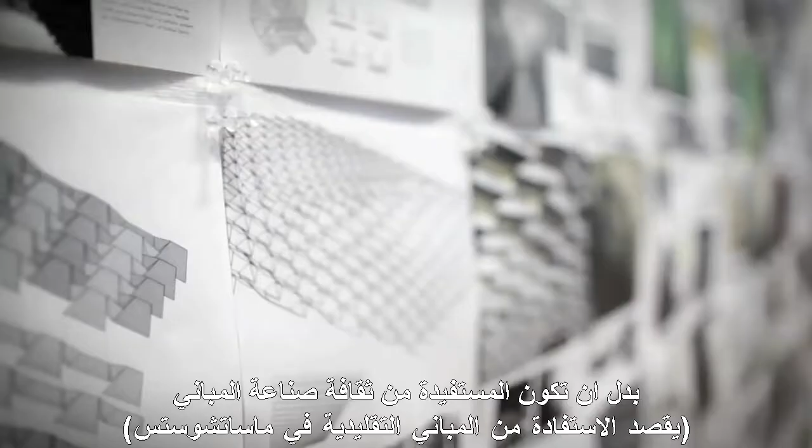Well, MIT is a very different kind of institute. Instead of becoming the recipients of building industry culture, we can now change building industry by the kinds of experiments we're doing in school.

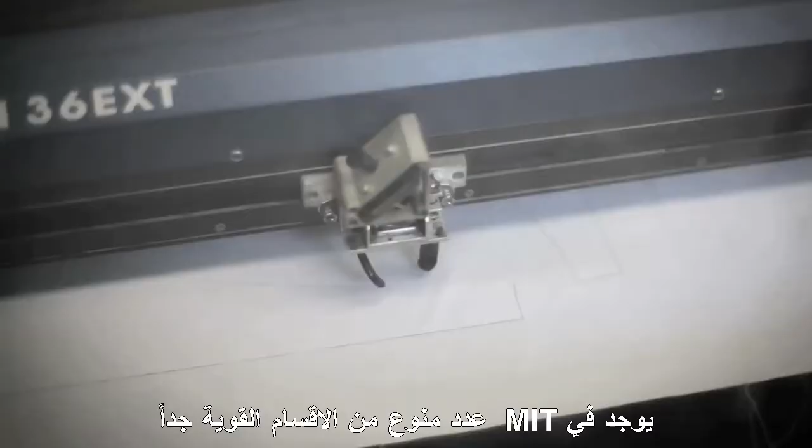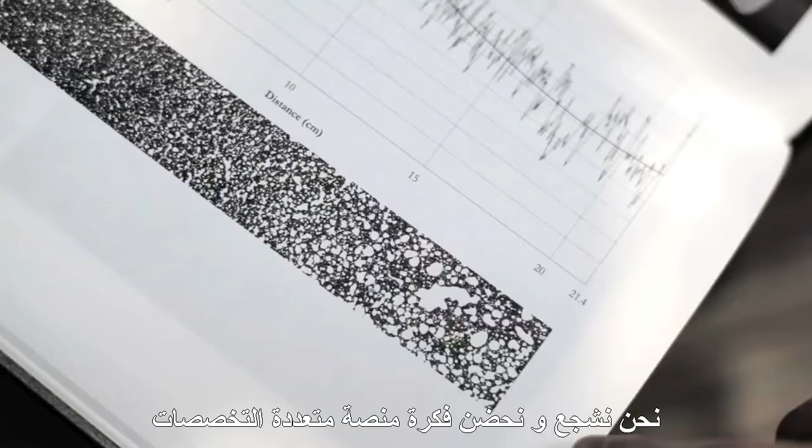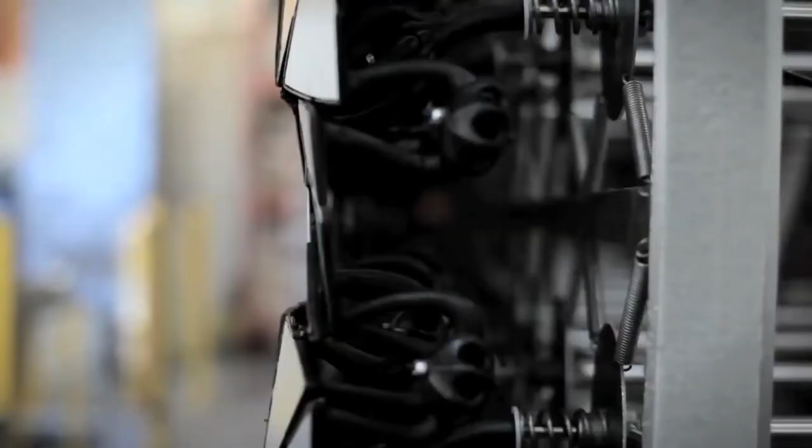MIT has a variety of departments that are so powerful that they have the potential of radicalizing what we do in design and in the architecture department. Even the way that we've structured our curriculum around workshops and other kinds of collaborations fosters and encourages this kind of cross-disciplinary platform. So we're situated perfectly for the kinds of things that only MIT can do.

The invention of human artifacts of any kind always consists of three elements: the geometry, the process, and the material that constitute that artifact.

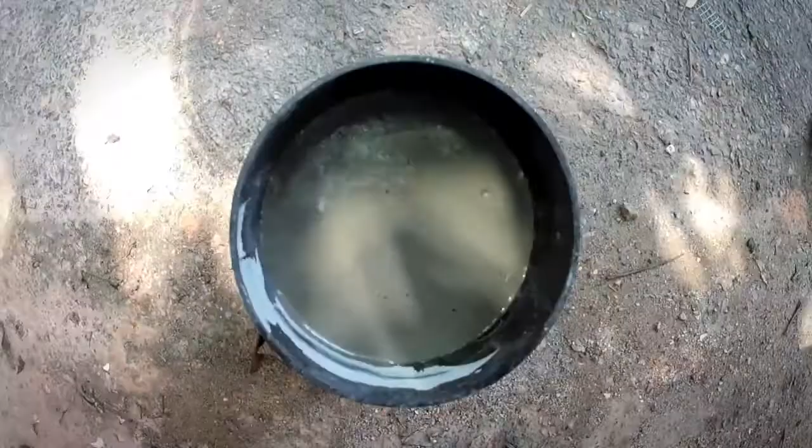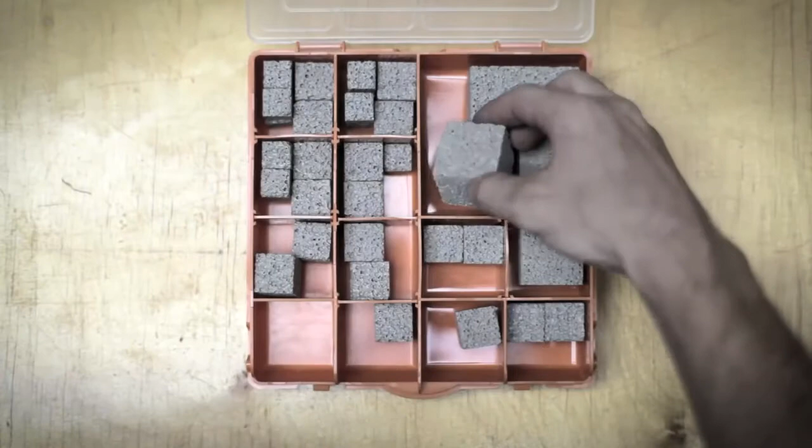It's very clear that new materials engender new forms, and architectural design benefits from addressing and applying new materials in an informed way. The Emergent Materials Group and the Urban Metabolism Group share a central interest in materials for the built environment. Lately, we've been working a great deal in the area of foamed materials, especially foamed cements and concretes.

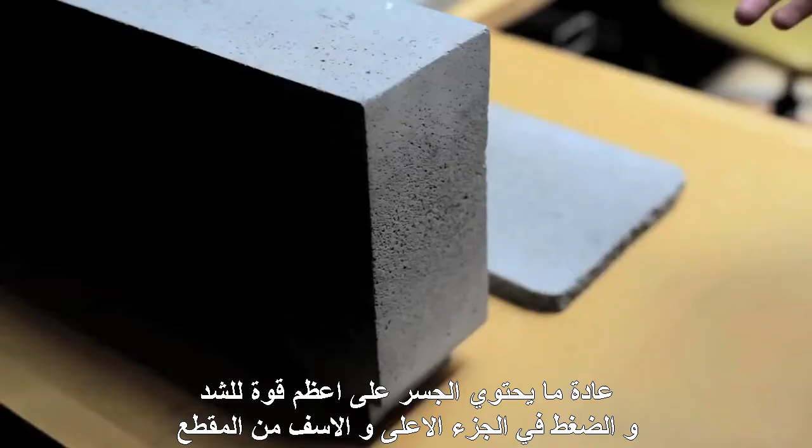So typically a beam in bending is going to have the greatest amount of stresses on the top and bottom, so we can reduce the amount of material on the interior of a beam.

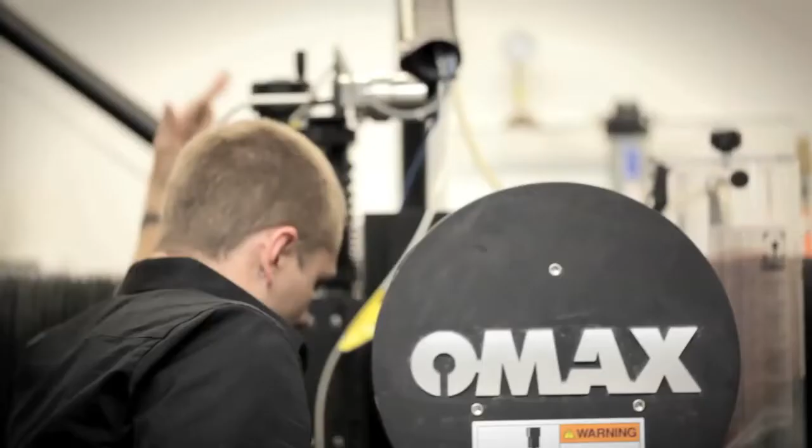The work really tries to address that there are two main paradigms throughout almost every industry. One paradigm is what can you design, what can you compute or analyze, and the other paradigm is what can you physically construct, or what can you build.

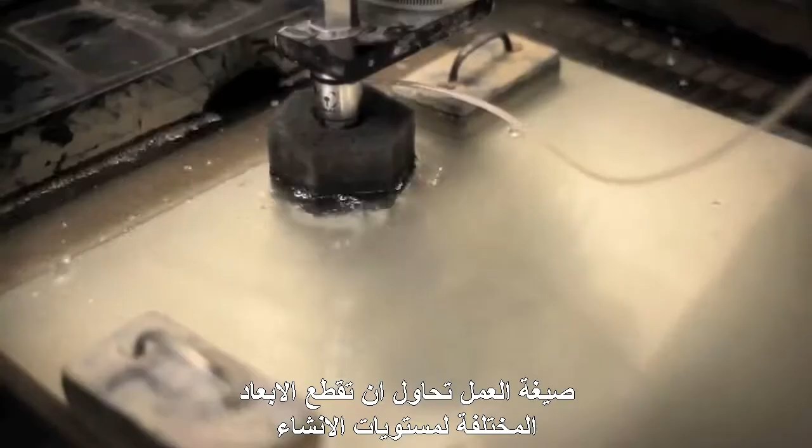The work really tries to traverse all scale lengths. It tries to work from the nanoscale, which is traditionally where we see self-assembly in biological and chemical examples, and it tries to bridge that and say, can't we use this phenomenon of self-assembly as a new paradigm for building things at large scale?

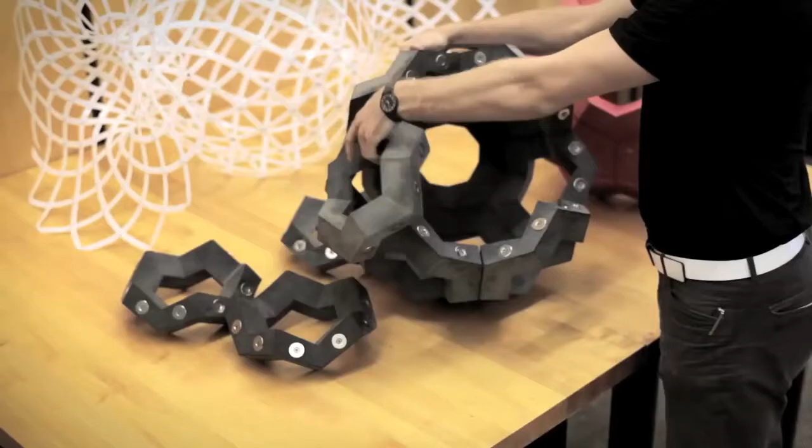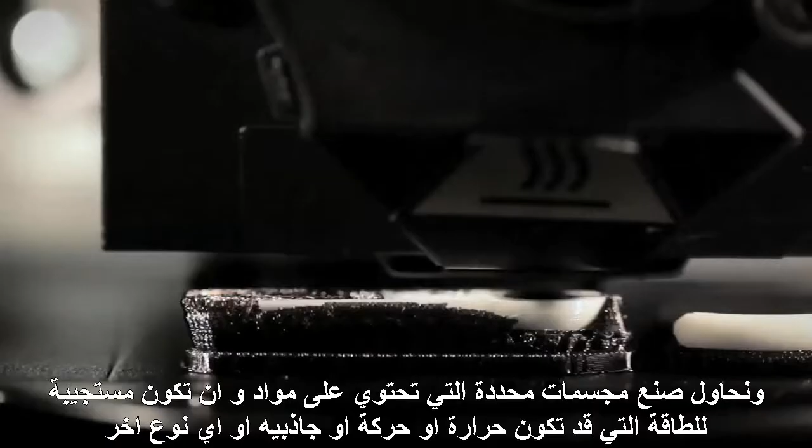We work with any type of material, synthetic or natural, and really try to design specific geometries with materials in mind. When you design those two together, they can respond to energy. The energy sources can be heat, shaking, gravity, pneumatics, electronics—any type of energy. When you mix that with the geometry and material properties, they can respond and change state.

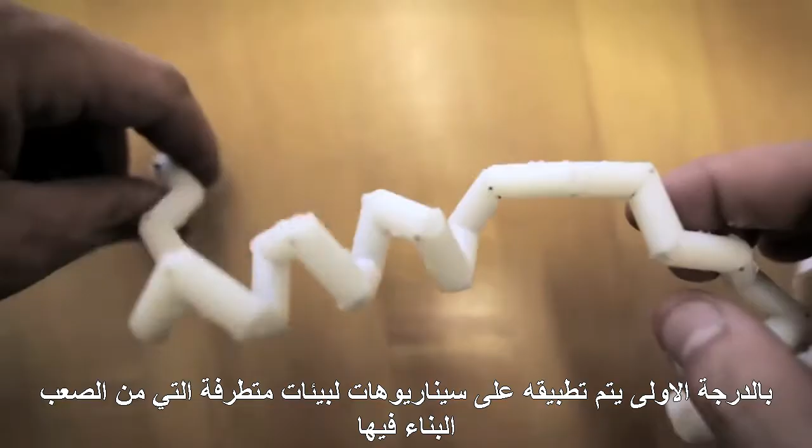Primarily, it will first be applied in extreme environments, scenarios where it's difficult to build.

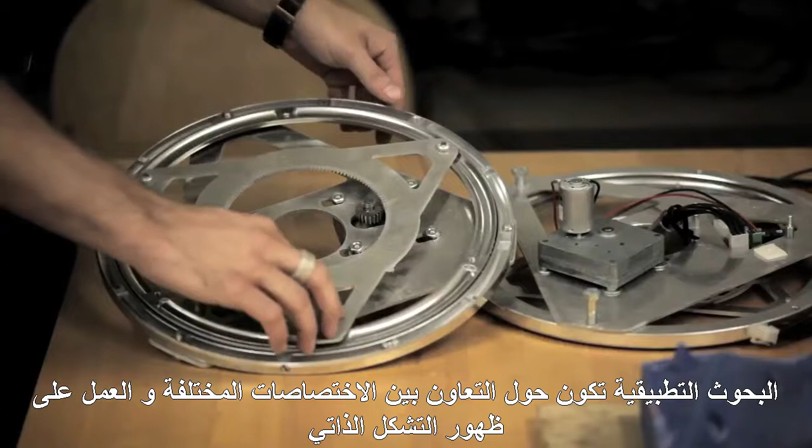The research and the practice is really about cross-disciplinary collaborations between designers, scientists, and engineers working on this phenomenon of self-assembly, discovering where we find it naturally, where we can use it synthetically, and trying to apply that at all different scale lengths.

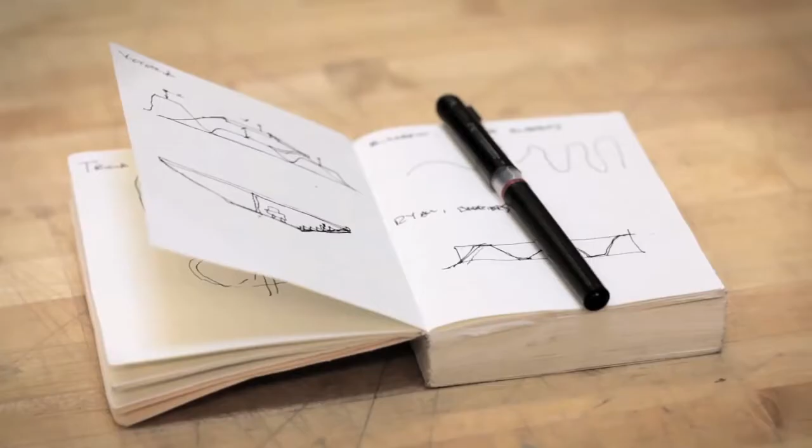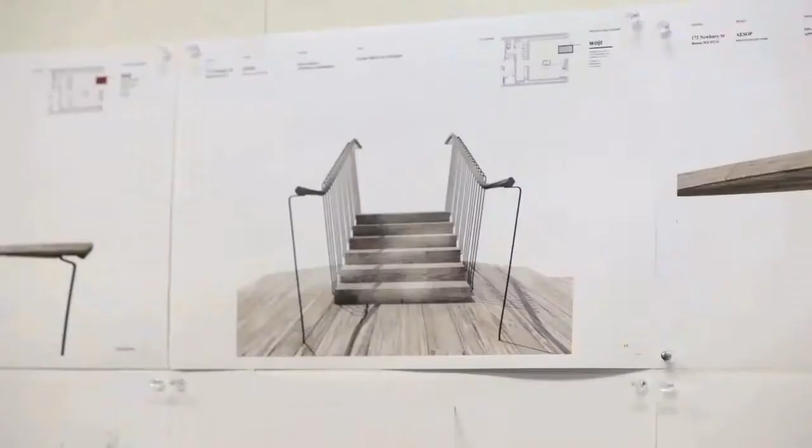The focus of our work, at least at this smaller scale, at the scale of art installations or retail, we leverage CNC fabrication methods, but not as a way to exude their prowess necessarily, but more as a way to help us get at a particular formal agenda.

An installation called Tótems, which in a way is a kind of proto-architecture—not quite architectural, not quite sculptural—I think it offers a kind of proposition to each of those disciplines.

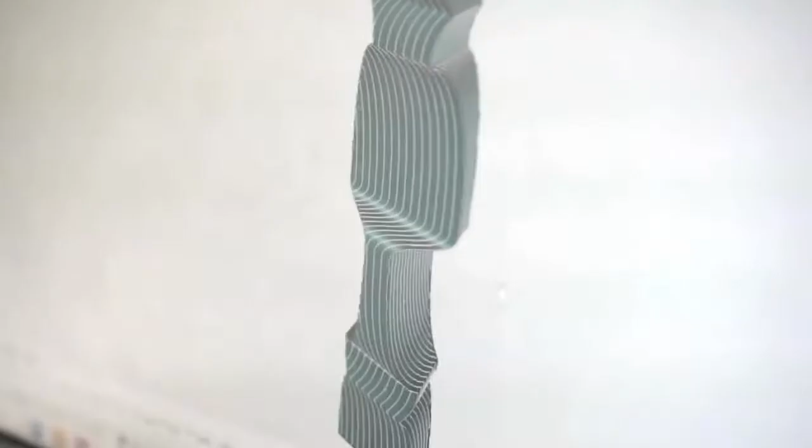We do a lot of testing via 3D prints. A lot of the formal investigations for Tótems specifically happened in 3D prints. We did maybe 30 to 50 3D prints of the totems as a way to understand how the light and shadows were working, and how best the anamorphic effects were working, before we went to the large format wire cutter.

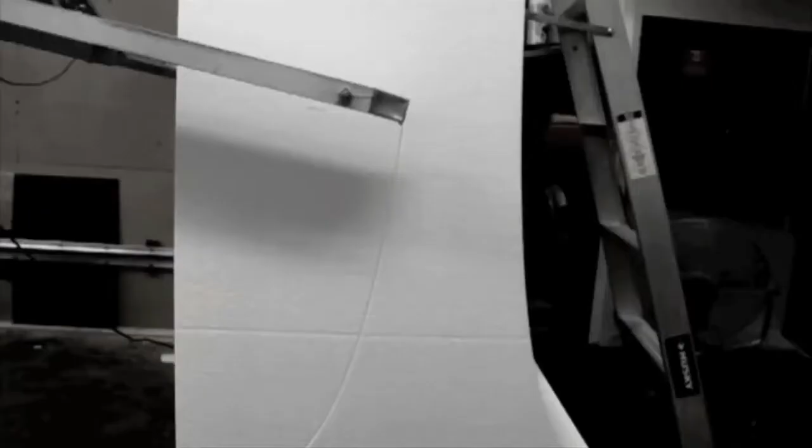In terms of collaborations, some of those happen here at MIT. Joel Lamere and I are developing an installation now, an anechoic chamber, which uses industrial felt both on its exterior and as a way to absorb sound on the interior. I'm bringing a kind of disciplinary, formal, or geometric interest on one hand, and also a certain set of specialized understandings of the behavior of these sheet materials on the other.

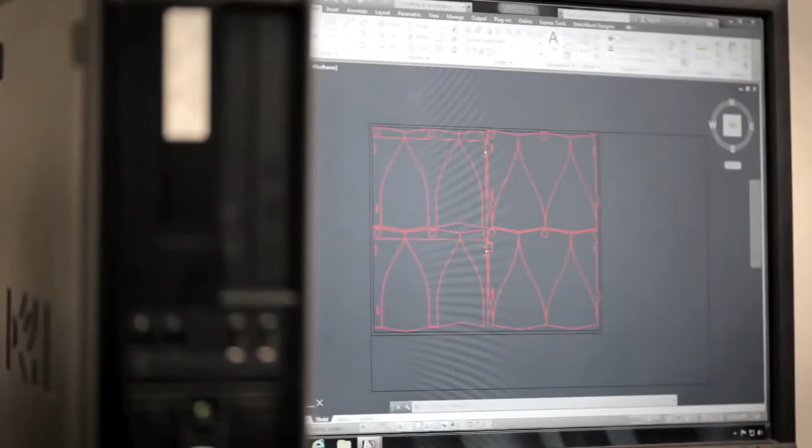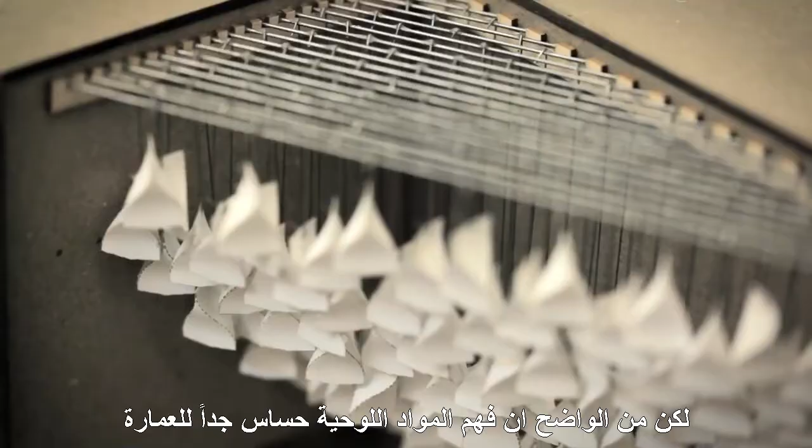My architectural interests are really broad, but in terms of my current research preoccupation, it's about material geometry—specifically sheet shapes, or sheet material geometries, how they bend, stretch, stack, and fold. Understanding sheet materials is really critical to architecture. It's a long-standing discourse in architecture, in part because it's so ubiquitous in conventional construction—plywood, sheet metal, steel, aluminum, plastics—all of these have to deal with developable surface geometries, which is to say sheet shapes generally. So expanding the total set of understandings about sheet shapes is a totally worthwhile architectural undertaking.

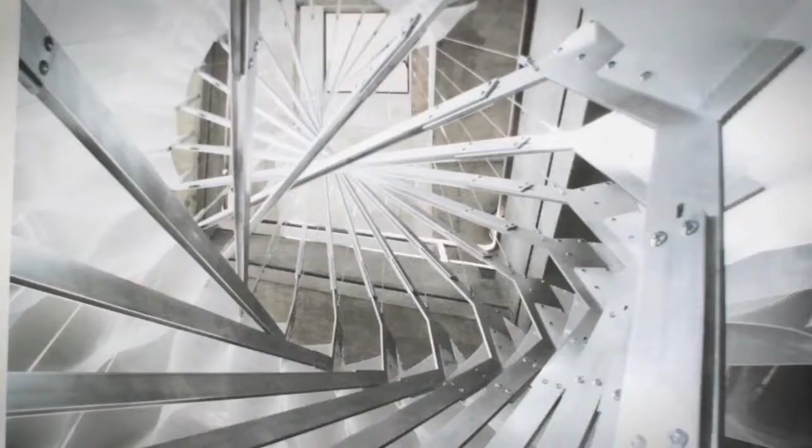These installations attempt to jump from the scale of the paper model to the scale of the architectural space, at the very least.

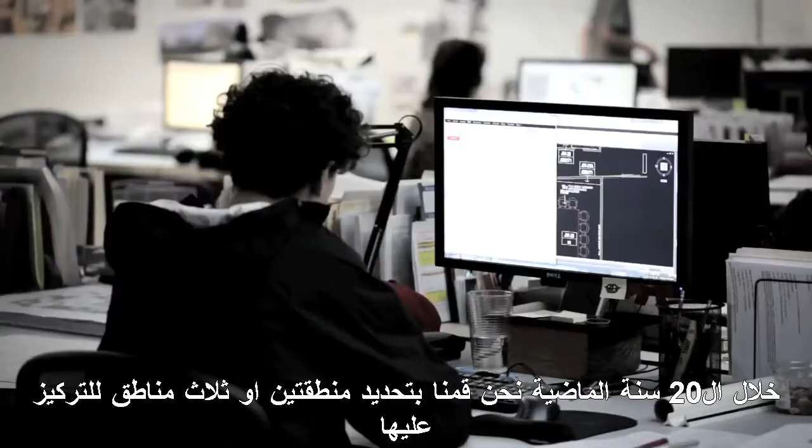Well, over the past 20 years, first as Office DA, now as NADAAA, we've identified two or three areas of focus. The first has been to look at materials and their behavior as a point of departure for many of the architectural experiments we do.

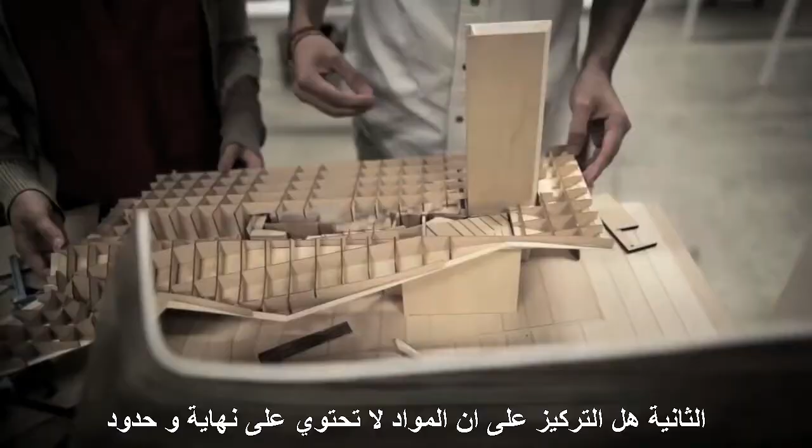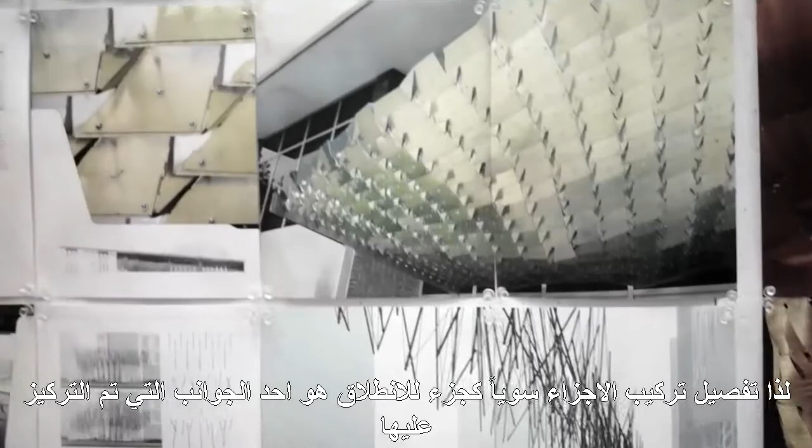The second area is to recognize that materials don't have an endless length. Everything comes in modules, in sheets, in blocks, in bricks, and without aggregation, there's no way of beginning to figure out how construction works in general.

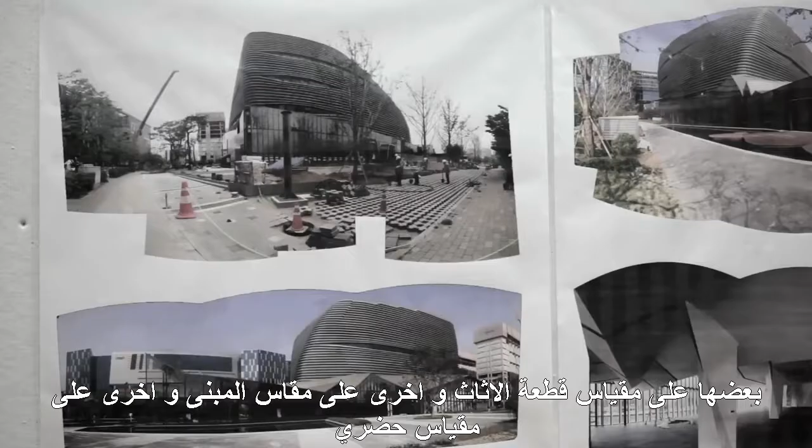So the detail of bringing things together as a point of departure has been another central focus. This has been a kind of point of revolution for a range of projects we've researched and undertaken, some at the scale of a piece of furniture, others at the scale of a building, and others at the scale of urbanism.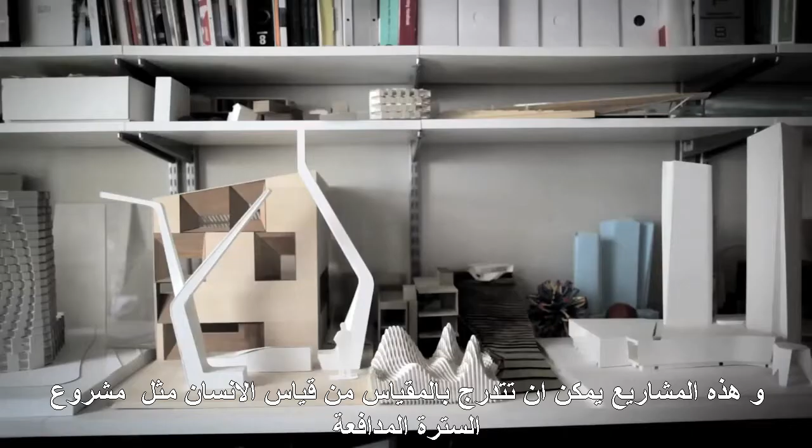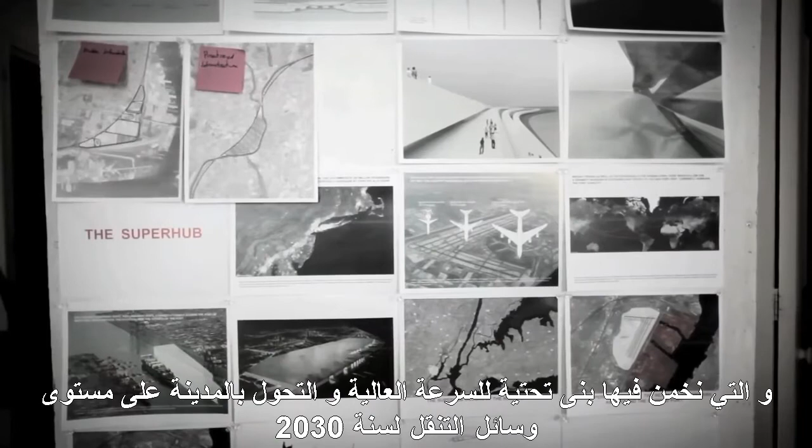One of the agendas of the studio is to create interactive architectures for public space through design and technology. These projects can range in scale from the scale of the body, such as the Defensible Dress Project, a wearable architecture which uses a microcontroller and shape memory alloys to defend your personal space, to very public scale infrastructural projects, such as our proposal for the Audi Urban Futures Initiative, where we're speculating on high-speed regional infrastructure and transformations in the city around issues of mobility for the year 2030.

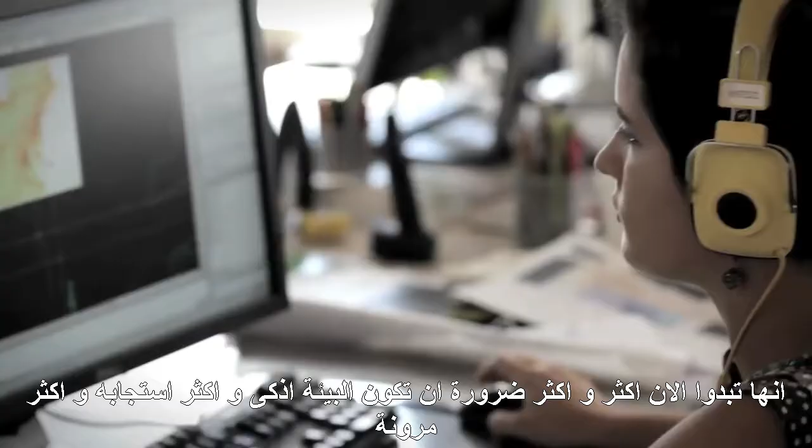It seems now more and more necessary that our environments have to become smarter, more responsive, and more flexible. The way in which architecture is made needs to be completely rethought if we're to go beyond bricks and mortar to engage the challenges of the next century.

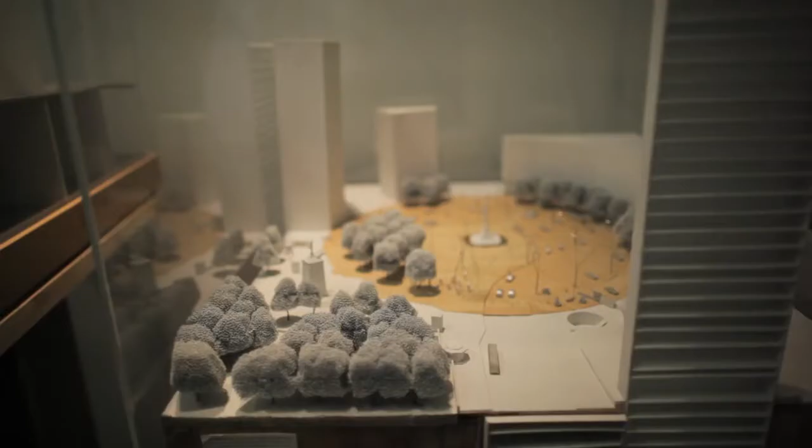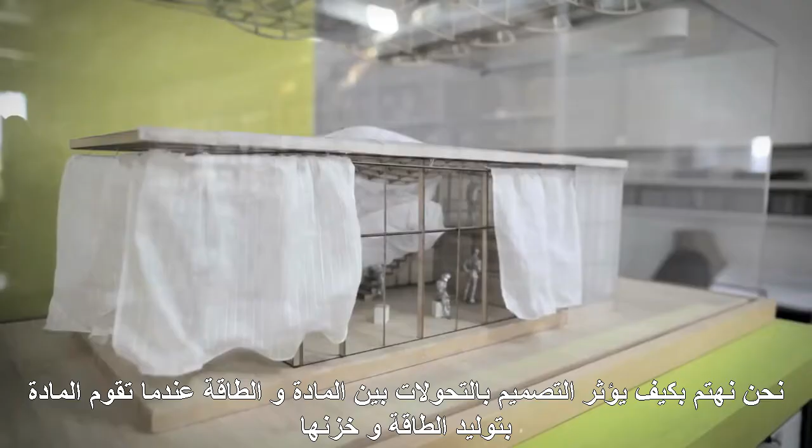My work as an architect focuses on designing architecture and urban scale interventions that engage the emergent infrastructure of our time. We're interested in how design engages that mutability between energy and matter, when materials generate energy or store it, when materials are dynamic and change state, exchange heat, produce light, or communicate information.

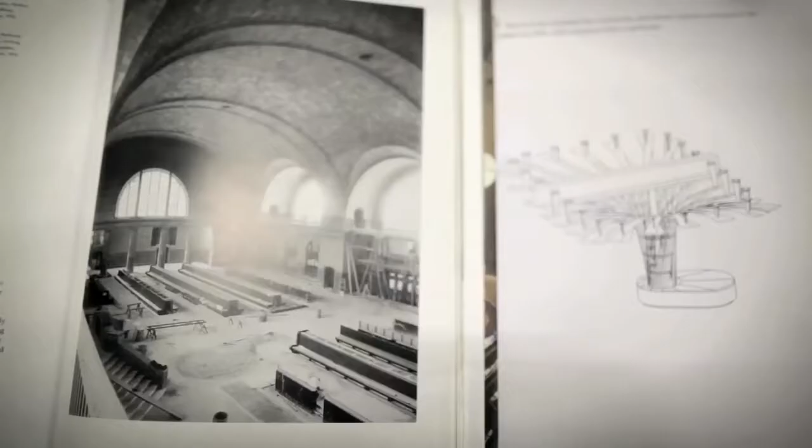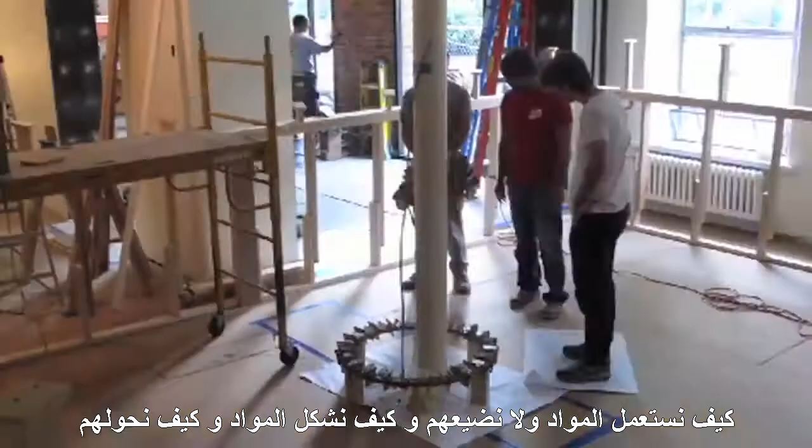The challenge, I think, for the discipline of architecture today isn't in digital fabrication, it's in material fabrication, in thinking about what it means to be material today when we move fluidly between digital and physical realms, how we use materials and not waste them, and how we form materials and how we transport them.

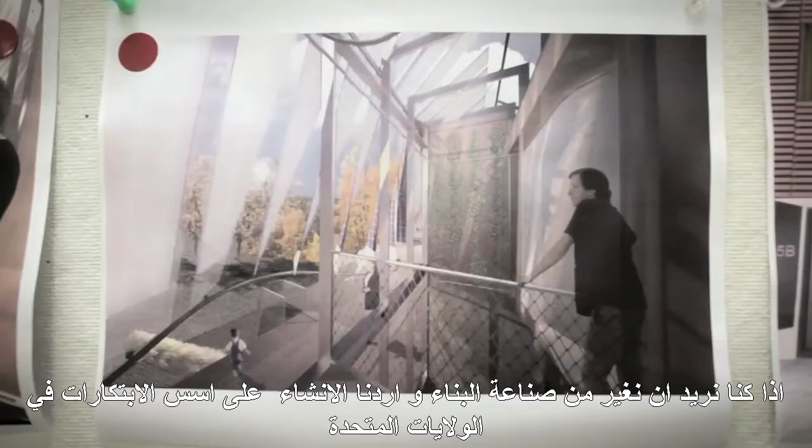If we're going to change the building industry and regenerate an innovation-based manufacturing segment in the United States, then I think we need to do this from within practice, from working with the norms of the building industry, but not settling for those norms, instead innovating to both accept and transform those standard conditions.

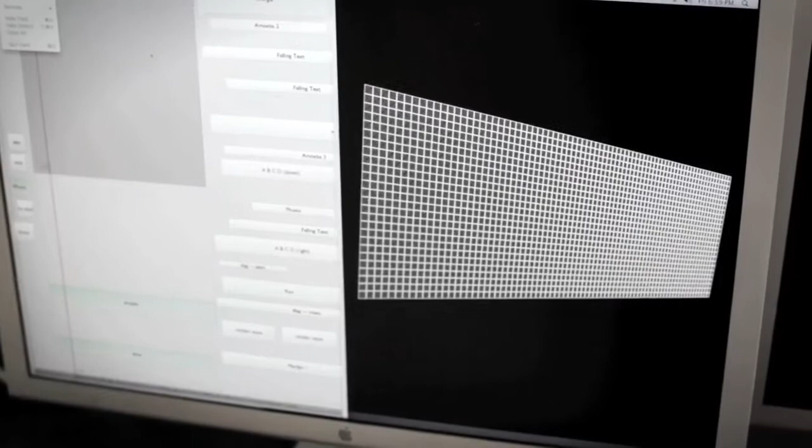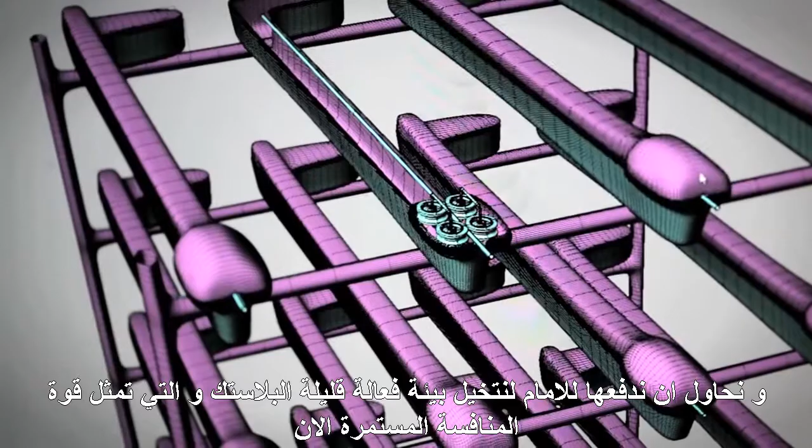I think we're pursuing several initiatives relating to computational material at several different areas. Dynamic interactivity is one with hypersurface, and we're driving that forward, imagining actively alloplastic environments, if you like. It's a demonstration of the power of computation come real time.

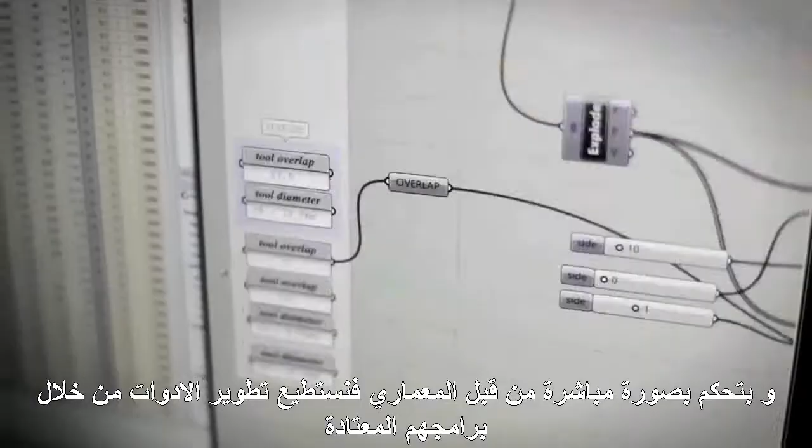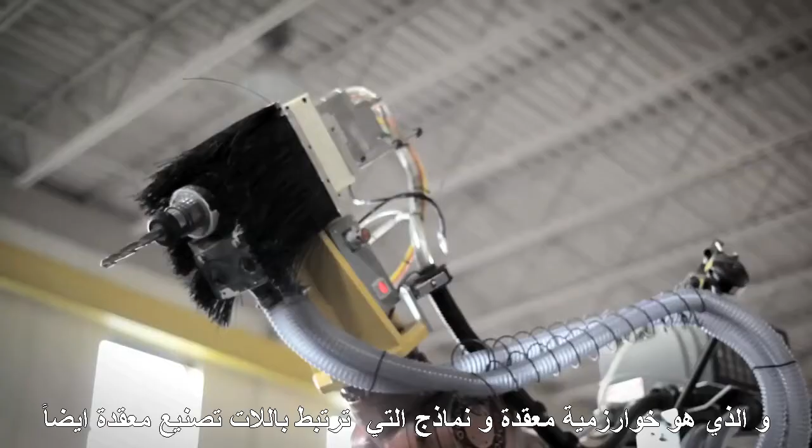Then in the robotic manufacturing work, we're looking for power, information and material all coming together, but with control directly at the architect's workplace. So we're developing tools that allow architects within their native software like Rhino to pilot a powerful production machine like a KUKA robot, demonstrating what will be the future of manufacturing: sophisticated algorithms and modeling that link directly to sophisticated manufacturing machines and allow both new efficiencies and new versatilities, new formal complexities.

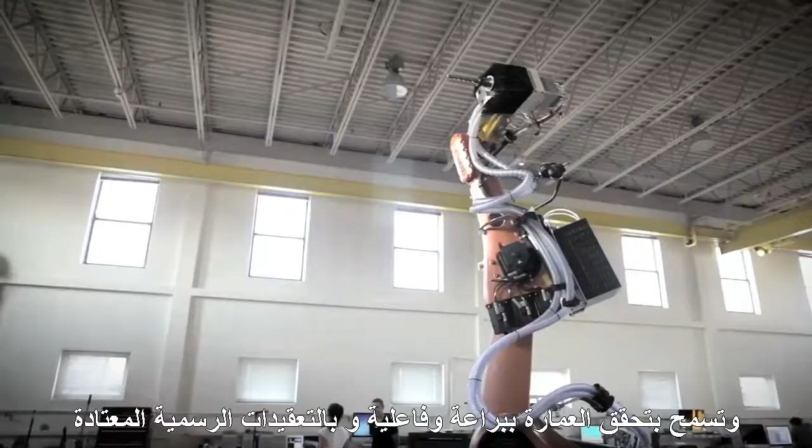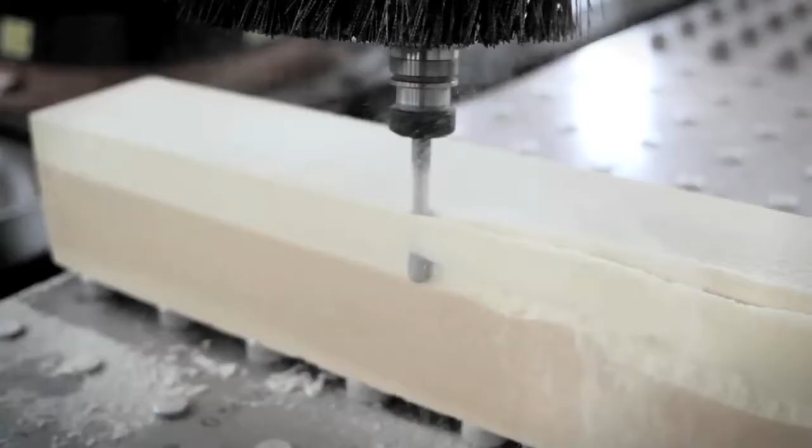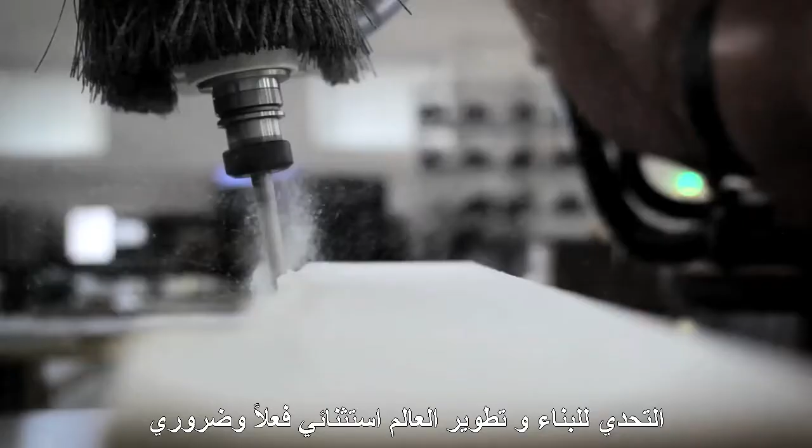I'm also frustrated by the slowness of the building industry to innovate materially. There's a fantastic amount of research in material science that's pent up and just dying to come out, at a period where environmental concerns are becoming so enormous, and the challenge of building the developing world is so extraordinary that they're necessary.

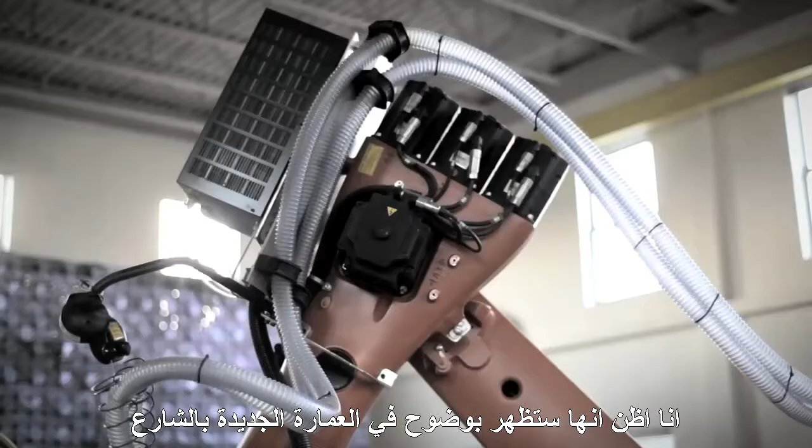CAD/CAM meets material science like composites, I think, is going to breathe a whole new life into the architectural and building industries.